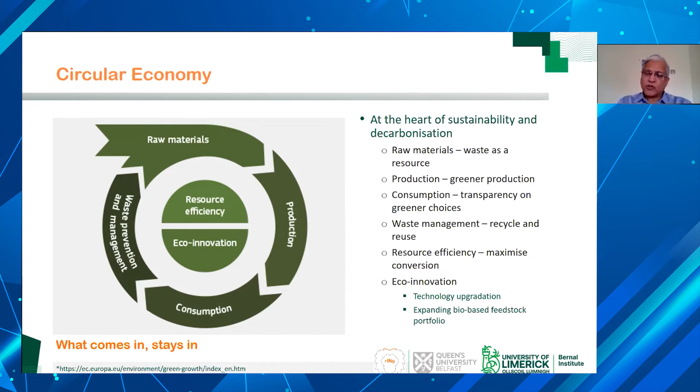Circular economy: particularly in Europe, there's a lot of emphasis on circular economy. But particularly in countries like India, it is really important to have that circular economy on the agriculture side. If you can recover not just energy and valuable compounds from waste biomass, but also fertilizer, those fertilizers can be recycled back to farms, because as you know, India is heavily dependent on potash and other fertilizer imports. If we are able to recycle those fertilizers, that's an added advantage. So considering these points, we started looking at anaerobic digestion.

Just one slide for characterizing waste biomass. There are a variety of different wastes. From the chemical engineering perspective, what do you call waste and what do you call resource? Typically, you call anything a resource if the price of the product you can recover times the mass fraction of product is greater than the cost of converting the raw material to product. Very simple first-year chemical engineering. So anything can be converted to a resource provided the product price is high, the mass fraction is high, or the cost of conversion is low.

As a chemical engineer, you need to work on all three. You need to select a high-value product, recover as much of it as possible, so increase the mass fraction of product, and bring down the cost of conversion. Chemistry and chemical engineering have a role in all of these areas. Particularly for anaerobic digestion, you also need to understand biological entities, because this transformation occurs via microbes.

Okay. If you look at waste biomass, or general waste materials, broadly speaking, waste can be grouped into two parts. One is dilute mixtures. Take, for example, polluted wastewater, industrial wastewater. It contains carbon, but in a very dilute form, typically 10,000 ppm or less. Right.

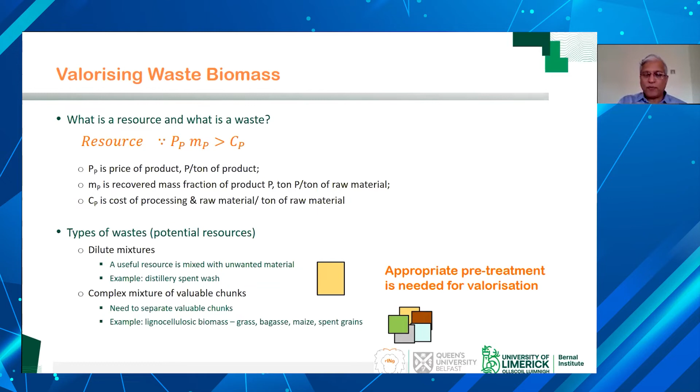So typically lignocellulosic biomass, or agricultural waste biomass, is of this second nature, where cellulose, hemicellulose, and lignin, these three valuable compounds, are interrelated and formed in a complex structure. So unless you have pre-treatment, unless you have a way of separating those valuable chunks, you will not be able to valorize it.

Okay. So coming back to waste biomass, this particular talk is focusing on waste biomass after the preliminary studies. I'm not going into details of why we eventually selected waste biomass and anaerobic digestion, but just trust me that the basic analysis indicated that valorization of biomass via anaerobic digestion made significant economic sense, particularly for countries like India, where decentralized production of clean energy like biogas or bio-CNG is valuable, right?

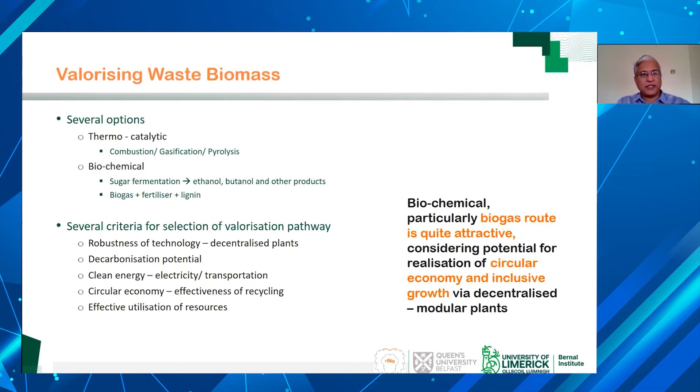So we are not going to talk about thermocatalytic or any other valorization routes of biomass. We are specifically focusing on valorization via anaerobic digestion. And I'm not going through all the criteria why we thought that anaerobic digestion is important. Just trust me that we did this analysis and concluded that, particularly for countries like India, it is very relevant to do anaerobic digestion.

I'm giving more emphasis on India, but I think some of these technologies are equally applicable to countries in Europe. For example, Germany has a very advanced anaerobic digestion program, though most of those anaerobic digesters are run using energy crops rather than waste biomass. We are not looking at anaerobic digestion of energy crops in today's talk. The focus is on valorizing waste biomass, agri residues, press mud in sugar mills, or even bagasse into valuable compounds via anaerobic digestion.

What are the advantages of anaerobic digestion? It's quite a robust technology, relatively low capex. Again, for countries like India, where capital is costly, it is important to have low capex technologies. Most importantly, it can handle wet feedstock. Typically, waste biomass is available with significant moisture content, and if your process requires drying it, that is significant energy consumption, significant carbon footprint, and so on. The advantage of AD is it can handle wet biomass. It can also help you recycle fertilizer, which is very important.

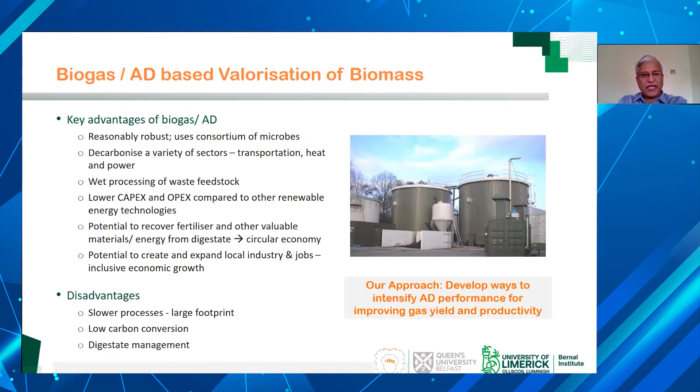And I have said that you can recycle fertilizer from the digestate coming out of the anaerobic digester. However, recovering fertilizer from digestate is also not very straightforward. It is possible, but you need appropriate processes to extract fertilizer from digestate. So these are the 3 areas which we thought we would focus on, and use some of our chemical engineering experience to intensify anaerobic digestion.

So I'll just take a one-slide detour to introduce my group. My group is now called the Multi-Phase Reactors and Intensification Group. We use experiments, computational modeling, reaction and reactor engineering, and machine learning approaches to develop new insights, innovations, and intensification strategies for the well-being of people and the well-being of the planet. For well-being of people, our group focuses on pharma, healthcare, and food and nutrition, developing factory-in-a-box platforms for distributed manufacturing in these sectors.

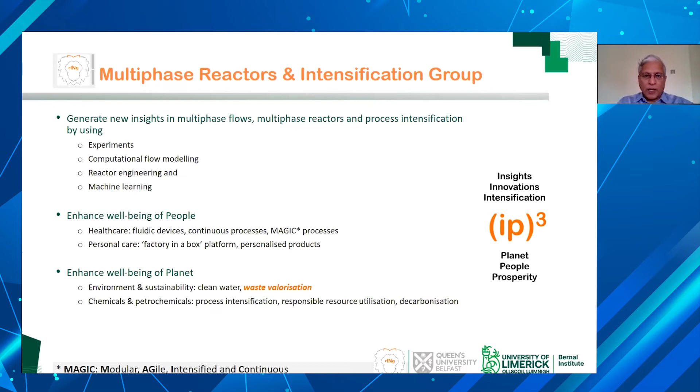On well-being of the planet, there are 2 main themes. One is decarbonization or effective resource utilization, essentially reactor engineering for large petrochemical and chemical companies, where we ensure that selectivities and conversions are in the best possible range. The second is circular economy and waste valorization. Today I'm going to focus on the waste valorization aspect of our research portfolio, specifically waste valorization via anaerobic digestion. And I must mention that all this work has been done by my students and collaborators.

So we are hoping that some of the results which I'm going to share with you will see implementation in practice in the coming years. Yeah, so I'm really grateful to all these funding agencies and to my students and collaborators. So let's come back to the theme.

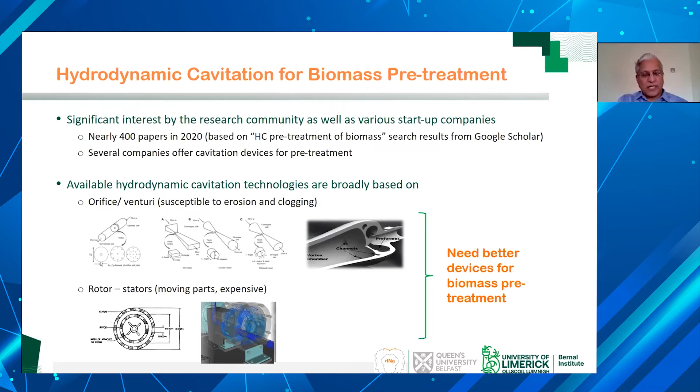And the other alternative devices are rotor stators, which involve very complex high-speed rotor motion with a very low clearance from the stator. Again, here, clogging potential is relatively less compared to the static devices because of the moving parts, but these are very capital intensive and also require significant maintenance because handling biomass slurries is not easy. It causes a lot of wear and tear. Cavitation itself will cause erosion. Right? So there is a need to develop new devices, and that is what we have done here.

So we have developed a vortex-based device, which is called the VODCA. So vortex-based devices for cavitation. These are in fact being commercialized by a company, Vivira. The key aspect of this device is it avoids those small constrictions, and it also avoids moving parts like rotor stator. And because of the peculiar design of this device, it causes early inception of cavitation. So it requires low energy consumption, doesn't clog, and causes very strong and intense contact between lighter biomass and cavitation.

So we essentially focused on this device and have looked at how this kind of device can be used for intensifying rates of digestion as well as improving the yield of digestion from waste biomass. So I'm going to flash a few slides. Anyone interested in any of these, I will be happy to discuss at the end. Many of these results, well, at least half of these results are already published. You will see those in published papers, right?

So I'm just showing you one example here with a grass silage. In Europe, typically a lot of farms have stored grass for their winter usage in the form of a silage, grass silage. And excess grass silage can be fed to anaerobic digestion for generating biogas. So we could in fact collect the grass silage samples from local farms here in Northern Ireland. And we essentially treated that using our cavitation device.

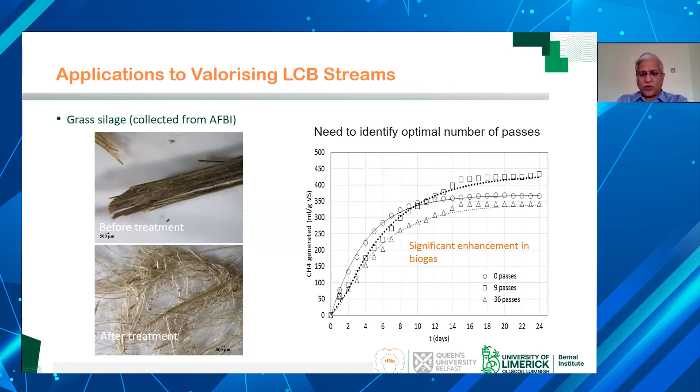You can see here, cavitation generated by these vortex-based devices can significantly open up this lignocellulosic biomass. It can also cleave the polymer chains so that we can find significant enhancement in biogas yield as well as rate. Okay, and this grass silage was obtained from a local agri-food bioscience institute near Belfast. But not just grass silage, we have used this device for a really large variety of different biomass feedstocks. So this is one example relevant to India.

So we could obtain soya grass samples from India, and you can clearly see that it can substantially improve biogas yield as well as rate of generation of biogas from soya grass sourced from India. The Indo-UK project, which I mentioned to you, which I'm working on with IIT Mumbai, IIT Madras, IIT Delhi, IIP Dehradun, and Vasantdada Sugar Institute from Pune.

We have been looking at waste biomass generated by sugar industries, like press mud, spent wash, as well as the bagasse. And again, you can see here, for bagasse it's almost 25% enhancement in biomethane. This is published in I&EC Research a couple of years back. Okay. And you can find an optimum number of passes depending on your overall objective function, depending on your CapEx and OpEx criteria, and use that for realizing substantial enhancement in biogas.

Okay. Sorry, I'm not showing you lots of results with different biomass because those will look repetitive. I mean, we have found this kind of increase in rate of digestion as well as yield of biomethane for a large variety of biomass. Let me switch to the modeling exercise and see how we can synergistically use better designs of hydrodynamic cavitation and computational modeling so that we can optimize the overall yield and digestion rates of the anaerobic digestion system.

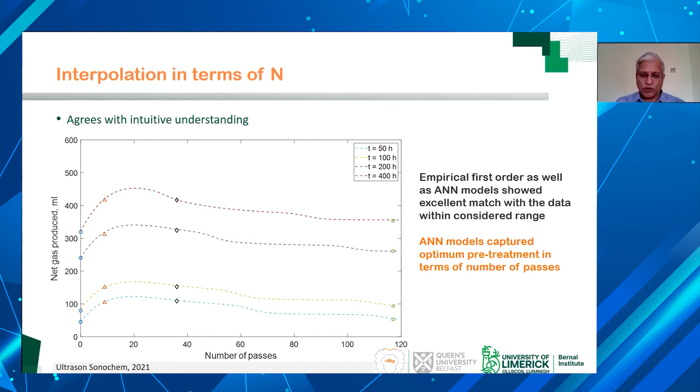However, if our objective is just to find an optimum between the experimentally studied range, probably you can use these machine learning approaches. But our intention was not that. Our intention was to really use the computational models to explore new parameter space so that we can come up with better operating windows for improving performance. So we decided that it will be useful to develop phenomenological models rather than just use the data-driven machine learning approaches.

So when we started looking at the modeling approaches for anaerobic digestion, broadly speaking, all those modeling approaches can be grouped into two parts. One, very simple empirical models like first order kinetics, or very complicated models like ADM1. ADM1 and ADM2 are two established International Water Association models, which take into account all the biological pathways of microbes and different compounds. It is easy to write down those balance equations in an ADM1-like model.

However, it is very, very difficult to obtain relevant model parameters because almost invariably no experimental data is available which will allow you to calculate all those tens, or in some cases even hundreds, of model parameters if you want to account for all those complex biological pathways. So by utilizing our chemical reactor engineering experience, we thought that we need an intermediate approach between a very simplistic empirical model and a very detailed model where model parameters are not available.

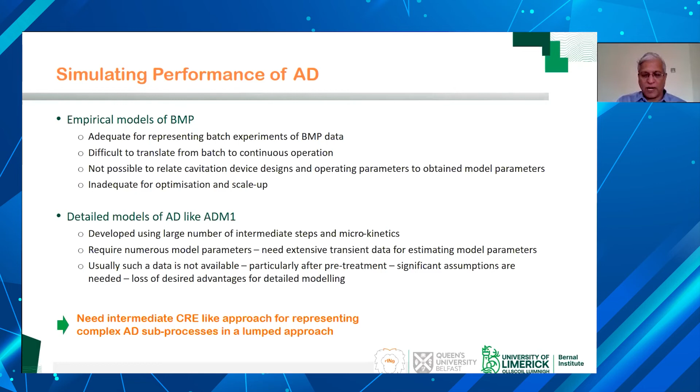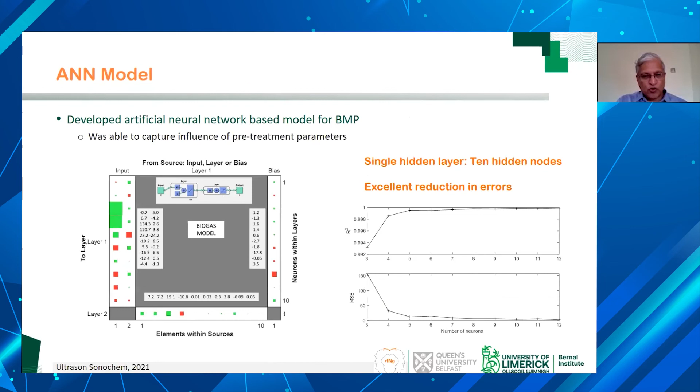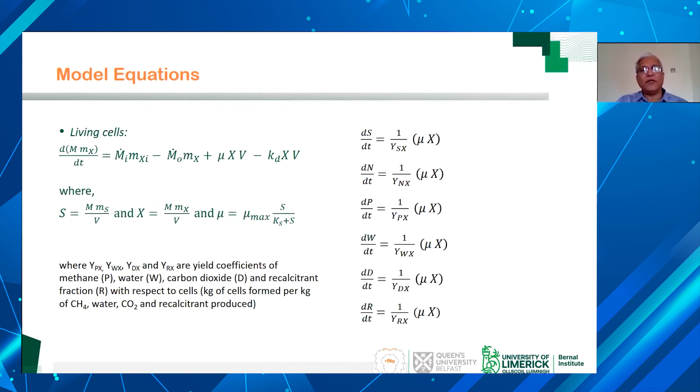We thought that we will develop an intermediate reactor engineering model which will allow you to extract parameters from routinely available tests, for example, this kind of data. So if you have this simple laboratory scale biomethane potential data, you should be able to extract model parameters. I'm not going into details of mathematics today. We essentially developed this reactor engineering model, which is based on three parameters: mu max, KD, so death rate of microbial cells, growth rate of microbial cells, and substrate inhibition.

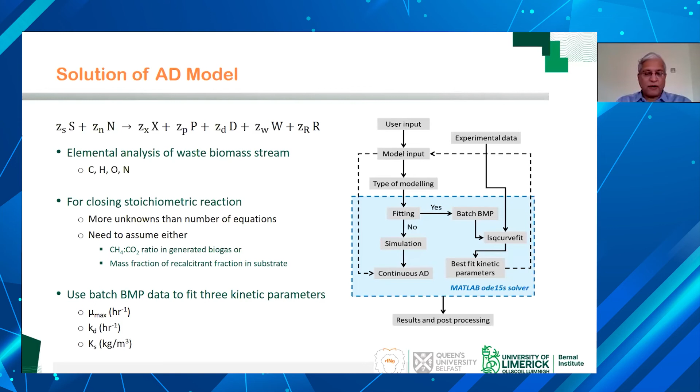So based on simple laboratory scale biomethane data, we were able to extract these three parameters using the model and then use these three parameter models. You can see here with those three parameters, the lab experimental data can be nicely described. And then those three parameters can be used for optimizing pre-treatment as well as optimizing the large scale anaerobic digestion designs. So that is the approach which we have taken. Very recently, our approach of intermediate modeling of anaerobic digestion has been published in Bioresource Technology.

So we use these models, we use laboratory scale experimental data with the laboratory scale hydrodynamic cavitation pretreatment, and then used our models for optimizing this scaled up operation. So we not only scaled up the pretreatment, we also scaled up anaerobic digestion to look at what is happening. So initially, even before we scaled up our hydrodynamic cavitation devices, we used these AD models computationally to explore different parameter space and identify whether single stage AD or multi-stage AD, or how best we can optimize anaerobic digestion designs.

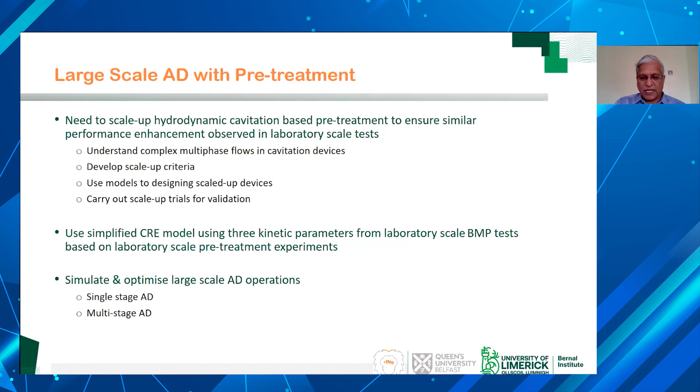This is, I would say, nothing really new; chemical reactor engineers have been routinely using these kinds of reaction engineering models and doing reactor optimizations. What is new here is anaerobic digesters were not really optimized using those approaches. So we could borrow some of our multi-phase reactor approaches and apply them to anaerobic digestion. And we have come up with better optimization strategies, and I'll share those results in a few minutes.

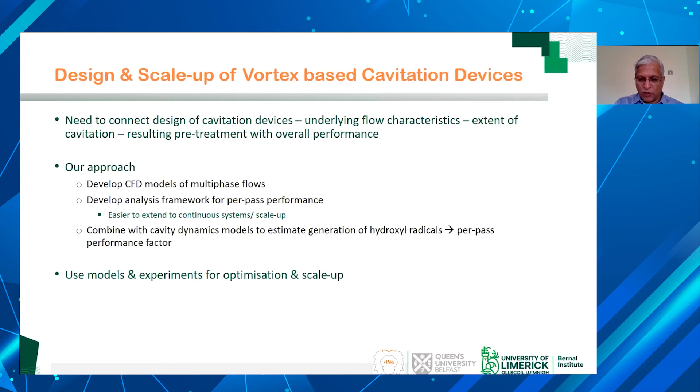So before we started thinking of applying this large-scale AD in practice, the primary constraint was scale up of the hydrodynamic cavitation device, because when implementing these pre-treatment methods on large scale, we had to first scale up our hydrodynamic cavitation device, which will ensure similar performance even on large scale before we can feed the pre-treated material to a larger anaerobic digester. So for that purpose, we used computational fluid dynamic models. We validated some of those models, developed an overall framework to look at what happens in one pass in the hydrodynamic cavitation device, and then extended those models for optimizing the overall hydrodynamic cavitation scale up and designs.

Again, my purpose for today's talk is not really to get into the nitty-gritty of computational flow models. If there are any specific questions on computational flow models, I will be happy to answer them at the end. Some of this work is already published in different journals. So we just want to flash a few slides on computational modeling of vortex devices.

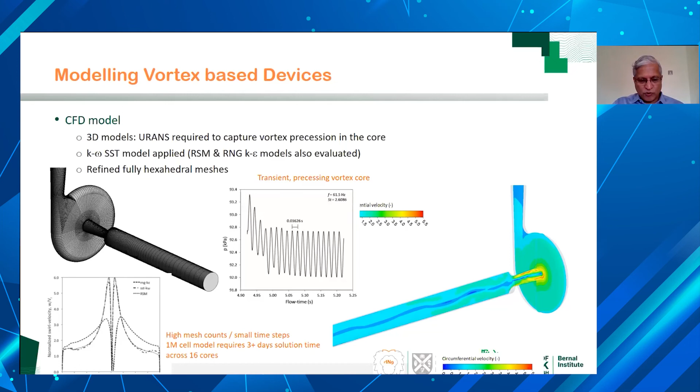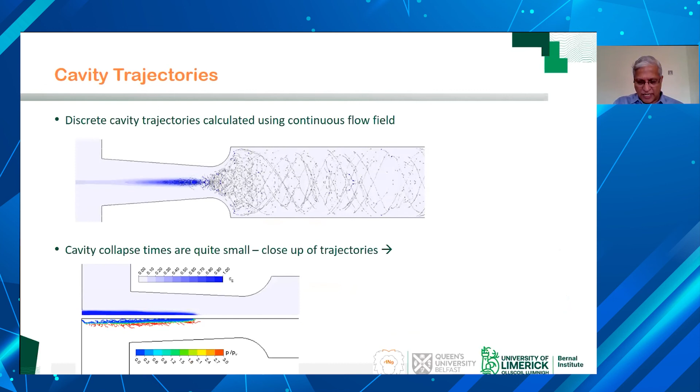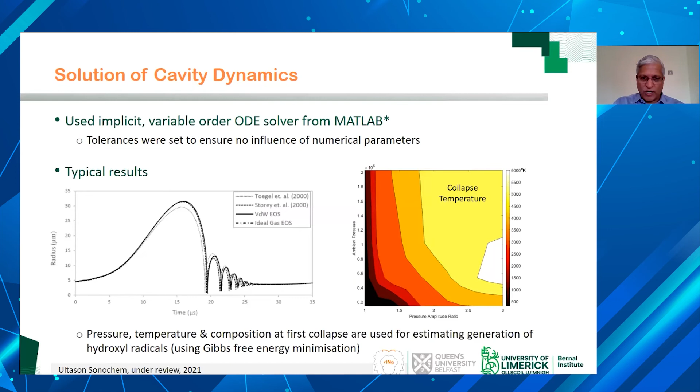So we used these models, validated these models, and then developed a framework by which we can characterize and understand the generated cavities, their trajectories, how they interact with biomass particles, how the individual cavity collapses, what kind of temperature and hammer pressure it generates, and what kind of hydroxyl radicals it generates. All of these different submodels are already published on different platforms. We essentially use these models to scale up our devices.

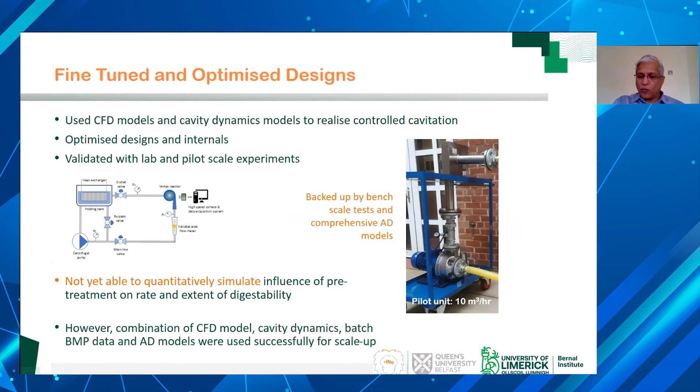Then we designed a batch scale, or I would say a pilot scale, bench scale device, with nominal flow capacity of 10 meter cube per hour, which validated some of our predictions, and then scaled it up further. So we not just scaled up the cavitation device, we used those scaled up devices, fabricated larger scale devices, and used them for pre-treating waste biomass on a larger scale.

So here I'm showing you a comparison of one of those biomasses, press mud. You can see our bench scale setup, 1.2 meter cube per hour, and a larger scale setup of 20 meter cube per hour, show similar kinds of enhancements in biogas yield with press mud.

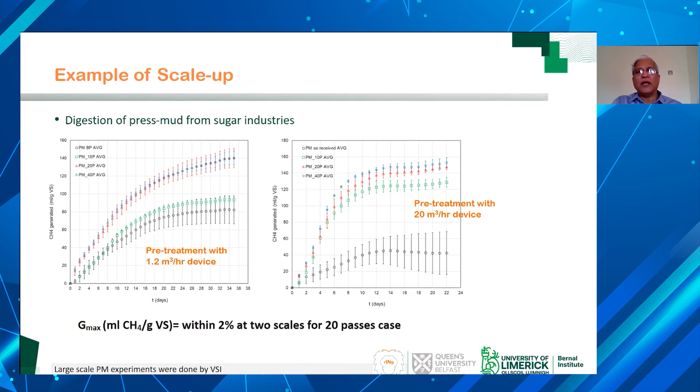This press mud was sourced from our collaborator in India, Vasant Dada Sugar Institute. In fact, these large scale tests were also done by Vasant Dada Sugar Institute partners, so I want to gratefully acknowledge their contributions here. The tests on the left side were done in my lab, whereas the large scale tests were done by VSI.

So this is kind of an indirect validation of our computational models and scale up strategy, that we were successfully able to use and scale up hydrodynamic cavitation based pre-treatment as well as the anaerobic digestion models.

So I'm now coming back to the last part of my talk. I have not gone into details of the science underlying all these advances. Rather than getting into all the details of underlying science and mathematics, I thought I'd share the overall results. If anyone is interested in understanding more about the science and mathematics underlying these advances, I'll be happy to engage either after the talk or separately. So I just want to end my talk by showing you the last 2 slides, sharing ongoing work.

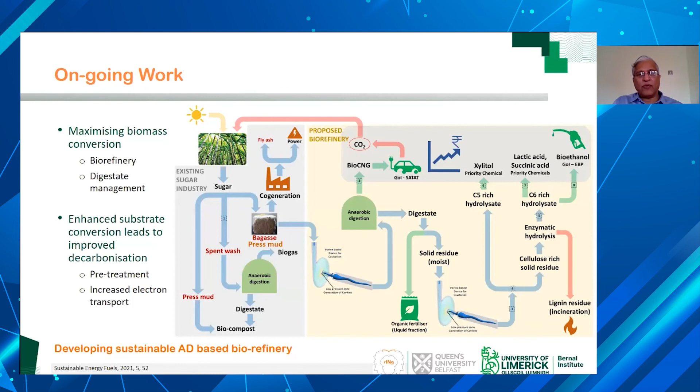Plus, we are also now looking at recovering fertilizer in a form suitable for deployment in agriculture. So we are trying to capture these fertilizers as struvite fertilizers from digestate. This is an ongoing activity.

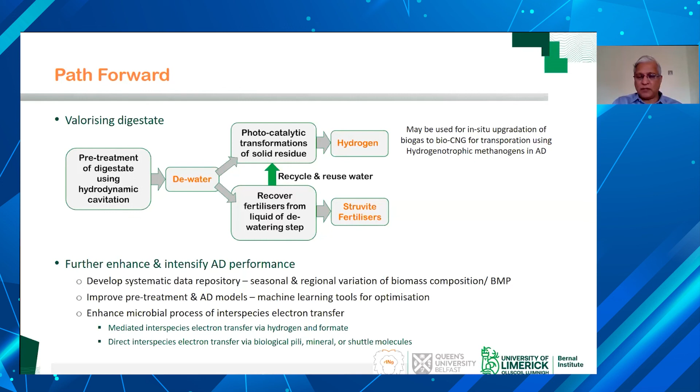And particularly in Europe, we are also trying to see whether we can use part of the digestate for generating hydrogen, which can then be used to make in situ upgradation of biogas to bio-CNG. Current established technology for converting biogas to bio-CNG uses pressure swing adsorption or other scrubbers, but instead, if we can convert part of the digestate to hydrogen, that can be used for in situ upgradation to bio-CNG. You can sparge this hydrogen back to the AD, which will then improve the biomethane percentage in biogas. So these are some of the ideas we are working on.

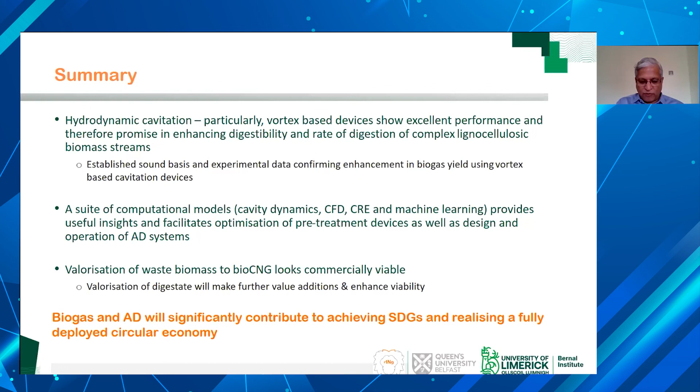I'm quite conscious of the time, so I'll probably stop here. I have tried to tell you that we have used hydrodynamic cavitation, particularly vortex-based hydrodynamic cavitation, to valorize biomass. Anaerobic digestion offers an attractive platform for wet valorization of biomass, particularly in a decentralized fashion. The bio-CNG can decarbonize a variety of different sectors, not just electricity and heat, but more importantly, transportation.

And particularly in India, the Government of India is giving significant importance to bio-CNG, and has come up with schemes like SATAT, which provides a subsidy. With the SATAT subsidy, we believe it will be possible to make this commercially viable, to convert waste biomass available in a decentralized way to bio-CNG for our transportation sector. So I will stop here and will be happy to handle your questions. Thank you.